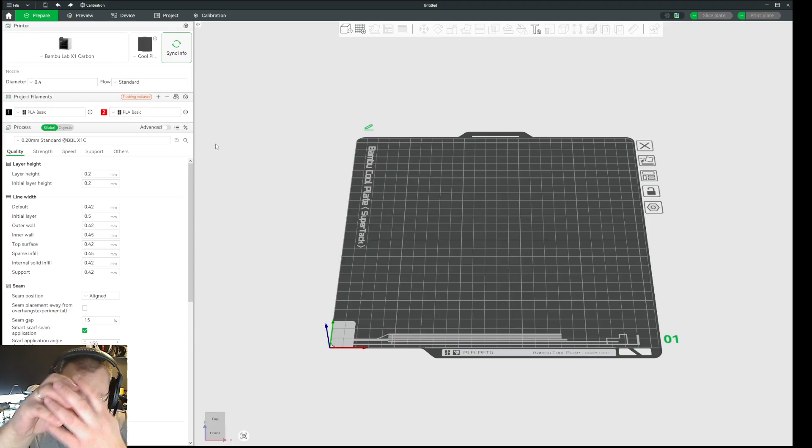You have several things that are in correlation to each other. Let's start with extrusion. Extrusion is when the extruder in the printer is pulling filament from the source, and then it's pushing it into the hot end. And then you have the physical melting of the filament happening in the hot end. And then you have the pressure used to squeeze the filament out. And that is, as far as I understand it correctly, the flow rate.

But you have also something called max volumetric speed, which is the power used to affect the flow rate. And different filaments have different kinds of power based on how fast it can melt. And if you are pushing it into the hot end faster than it can actually melt, then you will get a buildup of melted filament going up to the top, and it can cause those nasty blobs you can see on some videos or posts online.

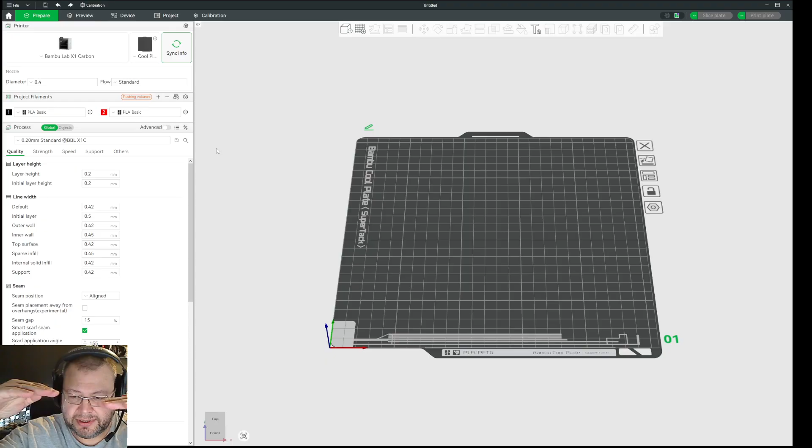I realized that when I actually saw that happening to one of mine, when I tried to use a too high value of volumetric speed for white filament, and then that filament started squeezing out between the hot end and the extruder, where the cutter usually goes. And then I started calibrating that, and I fixed that issue.

Now, to address the big question, what is flow rate? So flow rate basically is when you print, your nozzle will have a certain amount of filament based on the nozzle size that it will squeeze out. And you adjust the height of the build plate to be as perfect as possible based on the pressure you have for the filament that goes down, so that when you put down a line, it will not be too high and have low grip, and it will not be too close and have bad grip. So the set height is important to have a good laydown of the filament.

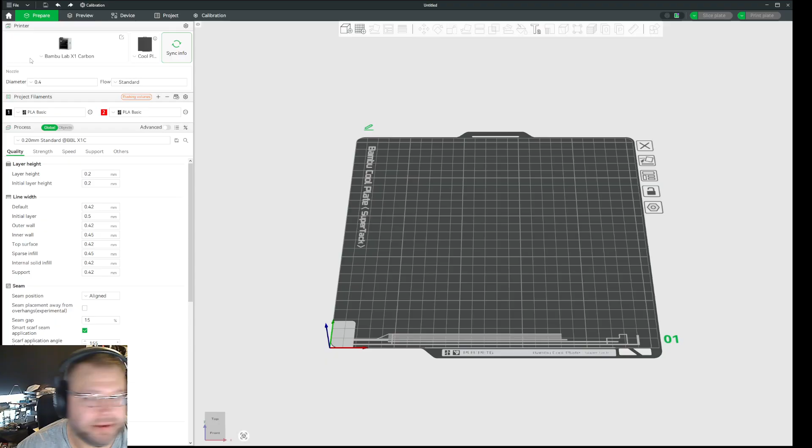Now, the flow rate is important because it usually has a value of 1. I can show you here, this is Bambu Studio, and you go into your setting here for the filament. You can select edit. Now on Bambu printers you can use Bambu filament, and these have like an RFID which will be read, and the flow rate and everything will sort of be automatically applied when you print. If you want, you can turn those off though.

Now inside the filament settings, under the filament, you have something called flow ratio. And that is something you can calibrate under here, calibration. So the flow rate for most filaments is set to 0.98. So if you set that to 1 here, which is what I'm talking about in my previous video, then you are basically having a 1-to-1 ratio.

So the maximum amount of filament you can push out is attempted to be pushed out at that flow rate. The problem is that most filaments do not behave properly when you use a flow rate higher than 1, because if you want to use ironing, for instance, ironing would typically try to get as close to 1 as possible without creating ripples and waves.

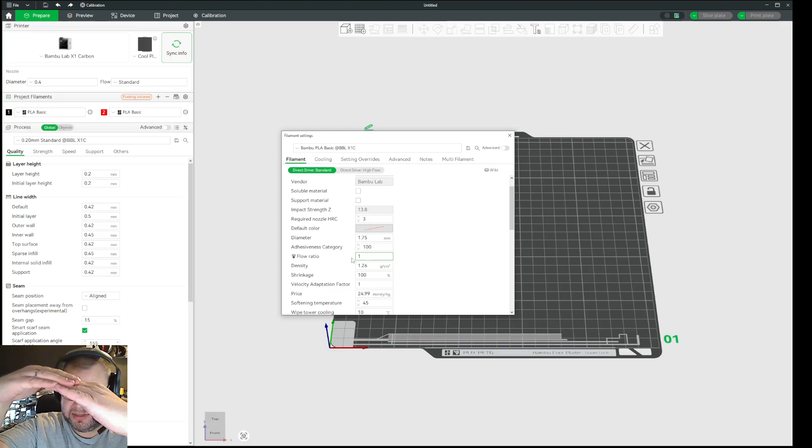Because what happens is that, let's say you put down your filament and you're printing and it goes forward, but you have too high flow rate, so the filament is pushed out a lot, and then the nozzle itself is getting filament pushed out on the sides, and it will basically be pushing the filament in front of itself, and you get these ripples and waves, and it just looks horrible.

So as a standard, start with 0.98, as you saw the filament had here as a value. Now, if you run a calibration, you should use 0.98 as a baseline for that calibration, and then it will try to adjust it upwards and downwards in the calibration settings.

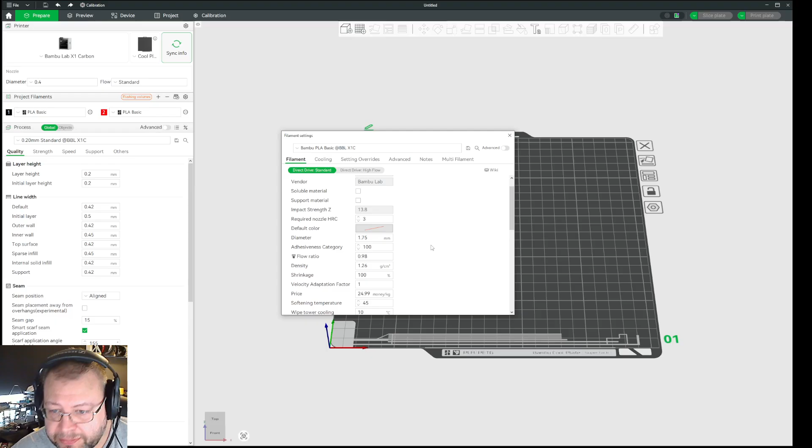In my video, I told you that I discovered that any filament I have at least fails and gives ripple patterns if I use a flow rate that's 1 or higher. That's not the same as saying you should never use it, because there are some weird filaments out there that actually could require a bit more flow rate to give adequate prints.

But for me, I print mostly PLA and PETG, and when I started having these problems for over half a year, this is the final solution I came to. My value was set to like 1.050 or something like that, and this basically created, even from the first layer, ripples and patterns, and the prints were just horrible.

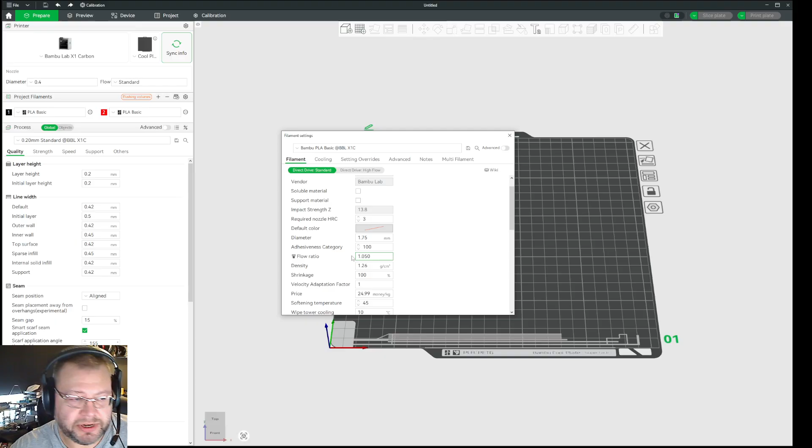So in Bambu Studio, it's here, and if you go to Orca Slicer, it looks like this, and you have it basically in the same settings, on the filament, and then let's see where you have it. You have it here, flow ratio.

Now you have something in Orca Slicer called pressure advance. It's like when your printer is going to a corner, and then it needs to do a turn, and then needs to go back again. And to make sure that the line is perfectly symmetrical all the way around, it will try to dynamically adjust the pressure before it gets to the edge, and then turn and come back. And that is also what we call the K value.

It's not actually directly the flow value, but for specific filaments that's not Bambu filament, for instance, you have to also calibrate that. Otherwise, you will get to a turn, and you will get a really thin string, or maybe a big blob of filament, depending on your filament.

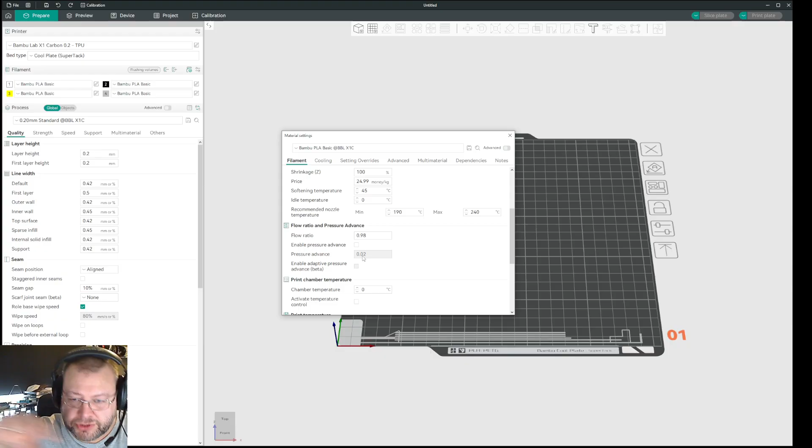So start by calibrating your flow ratio as good as possible to get a good line in a straight line, and then you start with doing the pressure advance calibrations.

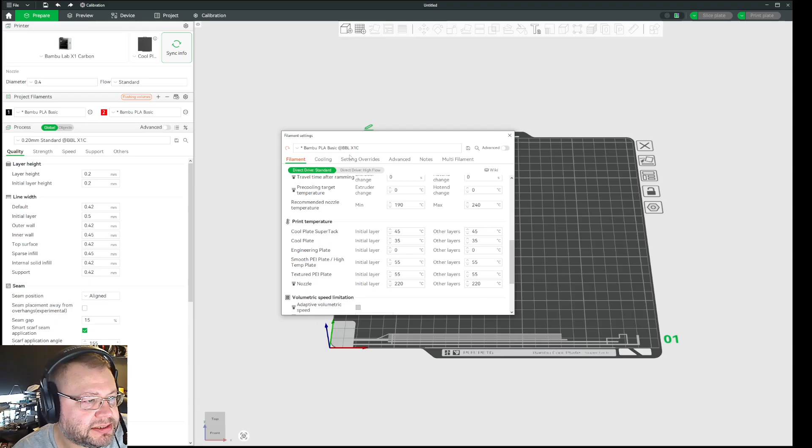Now, I do not know if Bambu Studio still has this. I'm checking here. I think it has it here, but you have to add adaptive volumetric speed. I don't know if that is the same thing. Let's see, advanced settings. I don't use Bambu Studio that much. Maybe there's a setting for it, but I use Orca Slicer most of the time, and I have to manually set it. And I can show you an example.

So in this case, for this filament, it will print, and then will come to a turn, and it will do an adjustment in pressure of 0.06 before it makes the turn and goes back, and then it drops that pressure again and it continues. So basically what you get then is a perfectly symmetrical line even in the turn. And that is basically what the pressure advance does.

And it is important to calibrate that. Otherwise your prints will look really, really weird in the places where it's supposed to connect to the walls. So the walls will look like it has gaps like this, because the pressure advance normally makes sure that the lines are symmetrical even when you do the turns and go back without over pressuring the filament.